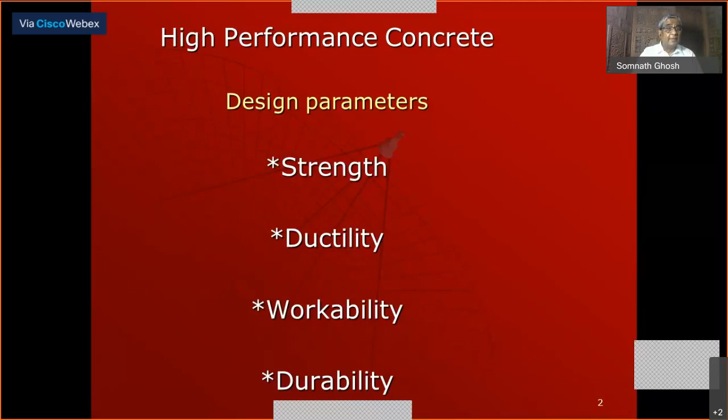Now, before I go to some experimental results and application in the industry, with the results and graphs and all these things, I would like to first tell you about this particular material, meaning concrete and especially high performance concrete, and what exactly we have to keep in mind so that we can achieve this kind of material, because we are saying high performance concrete, not ordinary concrete. So the important aspects are durability and permeability.

Nowadays, pumping is very important everywhere, because if you construct a very high-rise building, you cannot carry the concrete on your head, you have to use the pump. Pumpability is a very important aspect. Shrinkage is very, very important - we discuss about shrinkage every time. Heat generation is also important. And I have taken permeability and durability together, because I personally think these two are linked.

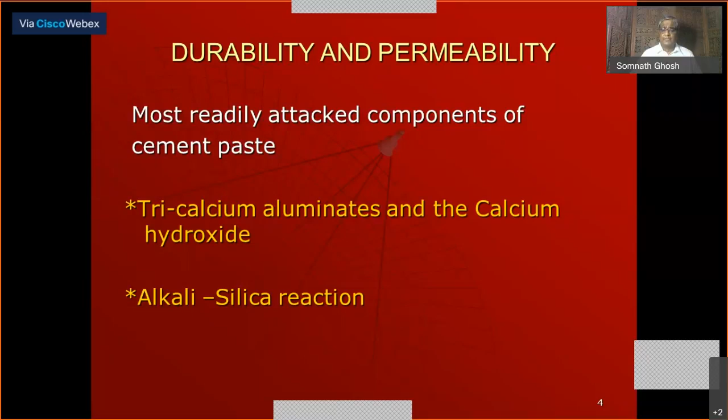You cannot isolate durability without permeability, or permeability without durability. These two are linked, so I'll come to this point one after another. When you are talking about durability and permeability, tri-calcium aluminate and calcium hydroxide. These are very important things.

These are present in cement, and alkali silica reaction is possible in concrete. Now, if you have to consider possible strategies to limit this negative occurrence, you have to limit the total alkali, sodium plus potassium, in cement, and test the aggregates for reactivity. If you can provide excess silica, which you can get from fly ash, silica fumes, and other natural pozzolans, it's good, because it will consume the presence of alkali. If you can eliminate alkali to some extent in the final concrete, it is always good.

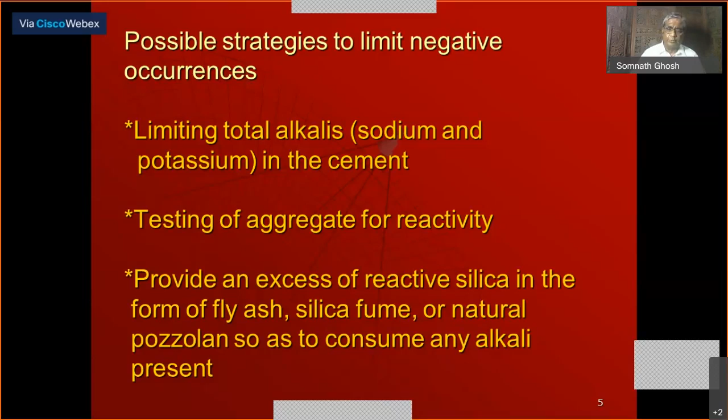Now there are a few problems. Incomplete compaction is happening, and ultimately resulting from segregation. Then micro cracks resulting from drying shrinkage and thermal stresses. Then bleeding settlement is a real problem, and the pores or capillaries, and the distribution of pore and their discontinuity is also important, because moisture movement depends mostly on this.

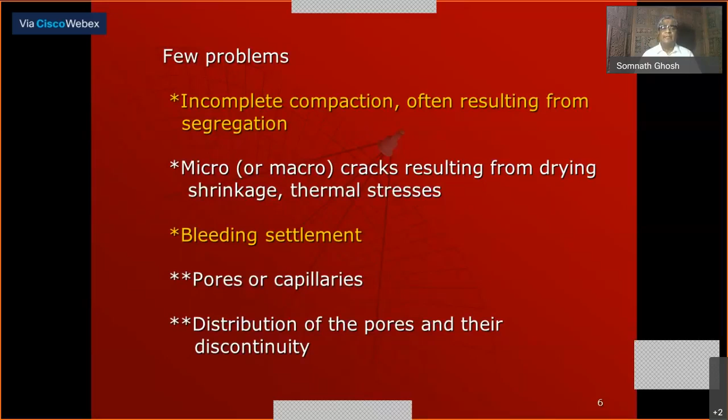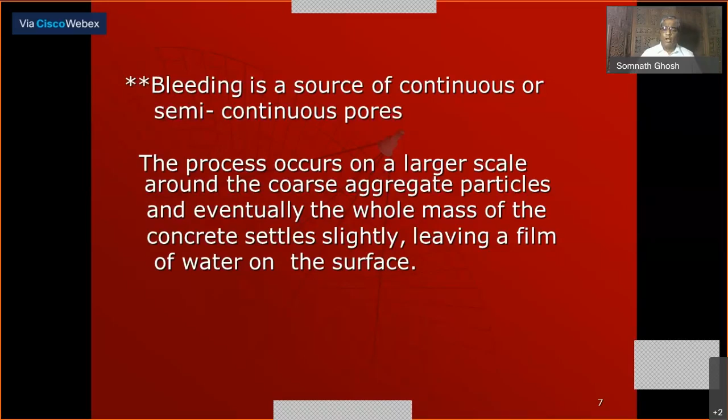Now, this bleeding is a source of continuous and semi-continuous channels. The process occurs on a larger scale around the coarse aggregate particles, and eventually the whole mass of concrete settles slightly, leaving a film of water on the surface. You all know it, but I'm repeating it, just refreshing your knowledge.

Then the reduction of permeability - this is achieved by avoiding bleeding. By blocking the channels after formation, you can really do a good thing. Pore blocking takes place as the cement continuously hydrates and extends the gel. The gels are formed and the pores are blocked. If we totally complete the pore, that is not always what I'm recommending, because I'll discuss that. But to the maximum extent, we should try to minimize the pores, because this will affect the durability and also the strength.

Now, this requires well curing, and the water cement ratio must be very low. So don't use high water cement ratio, because when we are talking about high performance concrete, there is no place for high water cement ratio.

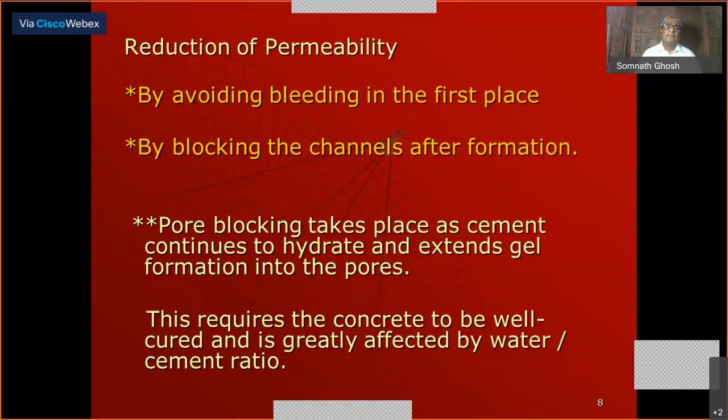Now you see, the aspect is: mortar in concrete consists of a mass of particles saturated with water, which is trying to escape in presence of more water, leading to bleeding. You all know, the better the particles are packed together, the more difficult it will be for water to pass through this mass. This is common sense.

Cement, slag, fly ash, entrained air, silica fumes - I'm telling you in increasing order of effectiveness - are good inhibitors of bleeding. Because why am I talking about bleeding? Because bleeding is very, very important in case of high performance concrete. Silica fume is the most effective inhibitor.

It may be many times finer than cement, even 10 to 15 times finer than cement particles, and it fills the space in between the cement. A small amount is sufficient in many situations, but excess amount is not really required. It is costly also.

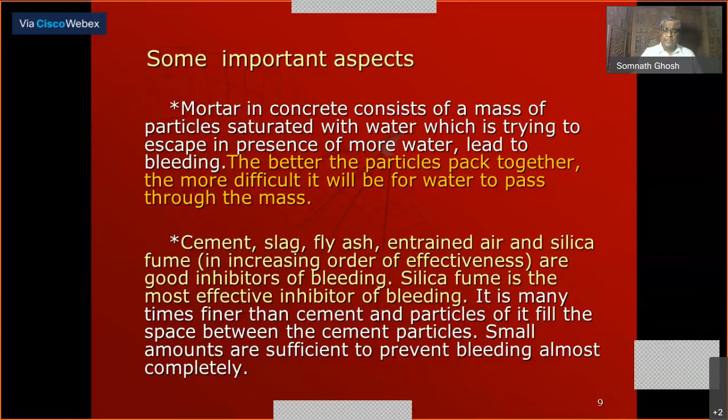Effectiveness of silica fume is greatly reduced if it is incompletely dispersed. This is very, very important. Those who are manufacturing RMC should know this, because high performance concrete, in presence of these admixtures and super plasticizers, RMC is the place where they can manufacture it easily. This means silica fume should always be used in conjunction with a super plasticizer and a given mixing time.

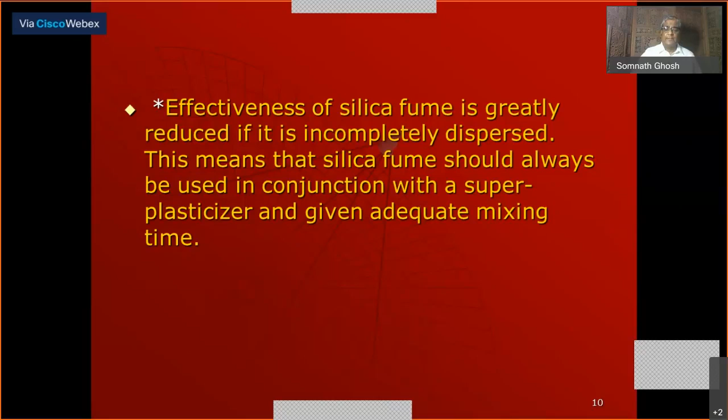So you have to mix it in, and you have to give some time. And then the question comes - pumpability. This is very, very important in case of high-rise building construction. To some extent, pumpability is equated to the resistance to bleeding, but not only this is the factor.

Now, blockage - the pumping failure occurs when the mix segregates under pressure. Segregation of mortar occurs due to gap-graded aggregates. Bleeding of water and/or segregation of cement paste may occur due to gap-graded aggregates. So you have to avoid this.

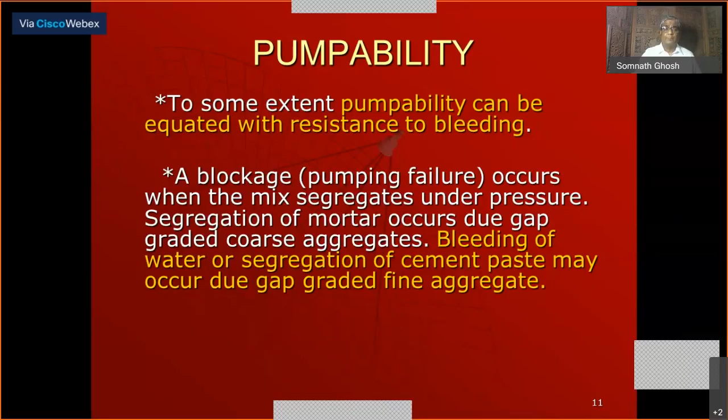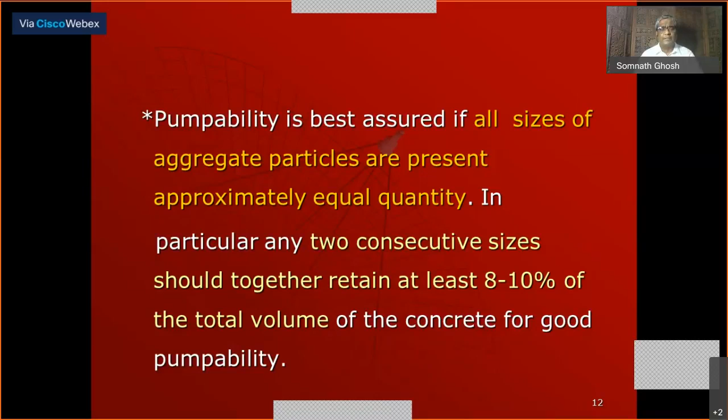Check it - now, pumpability is best assured if all sizes of aggregate particles, different types of aggregates, are present, not necessarily equal. You have to go for a mix design properly - just telling you the spirit of the mix design. In particular, any two consecutive sizes should together retain at least 8 to 10% of the total volume of concrete for good pumpability. These are all observations, and it's not that it will always happen like that.

But high performance concrete is a mixture of many things, so I'll discuss those things one after another. Now, the shrinkage.

Shrinkage is generally drying shrinkage, although further shrinkage may take place during its existence due to carbonation. The shrinkage occurs due to the contraction of hardened cement paste when it loses water. The contraction is resisted by the aggregates in the concrete, equally, especially the coarse aggregates.

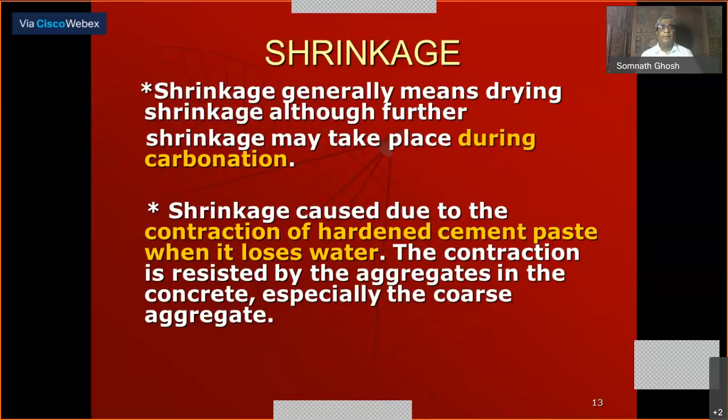Now you see, it is therefore to be expected that shrinkage will be largely dependent on the total amount of water, that you all know, and the elastic modulus of the aggregate, that you also all know.

And of course there's a problem in lightweight aggregate and many coarse aggregates which are subjected to moisture movement. That is also a problem.

And another influence is the presence of gypsum. Gypsum is very important. We have to use it in a controlled manner.

It may be noted that the action of shrinkage compensator, you heard about shrinkage compensator, is it not, is not in fact to directly inhibit the occurrence of drying shrinkage.

Rather, the normal shrinkage occurs when it is permitted to dry. So you can easily understand that during the fresh state, the shrinkage inhibitors help a lot. So the total shrinkage will come down, so you can use it.

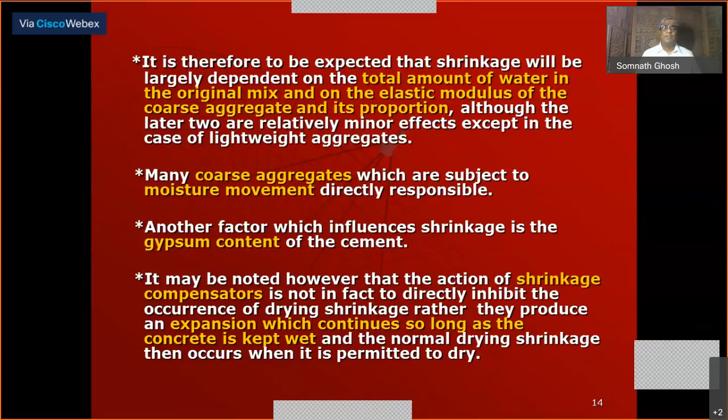Now the heat of hydration. Large masses of concrete generate substantial quantities of heat of hydration. You can always know, in dam construction it's a huge problem.

Many methods are tried to tackle this throughout the world, and essentially heat of hydration can be reduced by reducing the amount of tricalcium aluminate and tricalcium silicate present. That is common knowledge to everybody.

Low heat cement produces less heat than OPC and spreads its heat generation over a longer time period to dissipate better. You can see it takes a longer time.

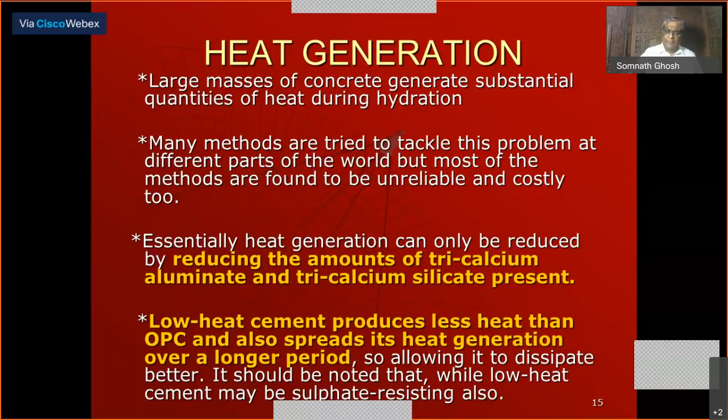So it should be noted that for low heat cement, normally we are using sulfate resisting cement. Okay, there are many other solutions also.

You see, fly ash is also equally useful in connection to heat generation. You can use fly ash to reduce the heat generation.

But the only thing is that if you use excess fly ash, then sometimes there's a problem, right?

Not sometimes, there are many reasons which, today I won't try to explain because we don't have much time, but anyway sometime I'll express in detail. So limited use of fly ash is always good.

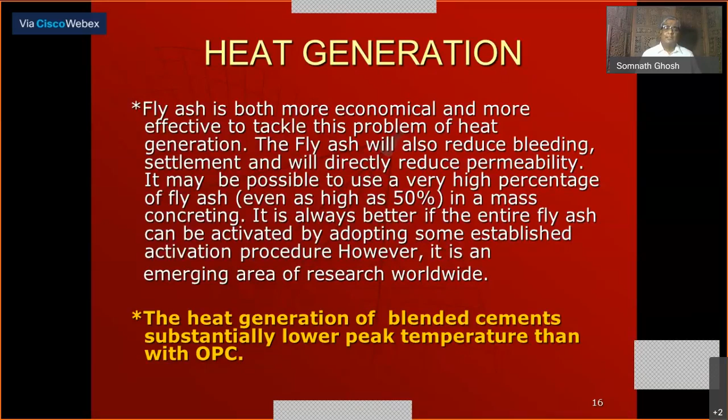The heat generation of blended cement, like fly ash cement or slag cement, shows substantially lower peak temperature than OPC. That we all know.

Now you see this, let us come to rheology, because you have to understand rheology in the best possible way.

It's a comparatively new term because it is not really discussed in detail in undergraduate courses. But anyway, it is coming up very fast, and every time people are using the term rheology.

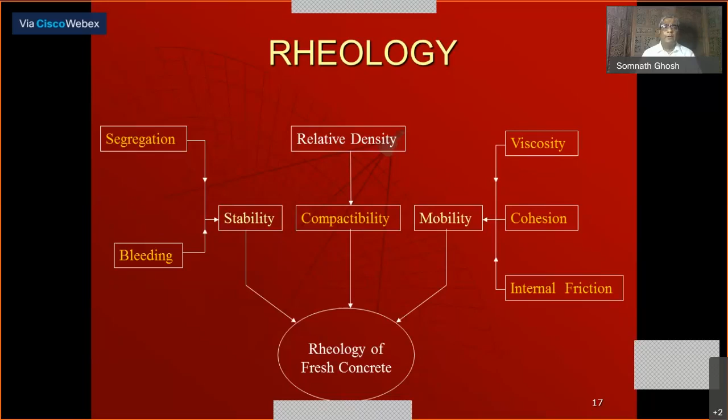Now you see this rheology, this minimum stress below which no flow occurs, that you all know, is it not? And the minimum stress is called yield stress for concrete.

You normally heard about the yield stress term for steel, but now it is for concrete, and it is represented by tau zero. The equation is tau equal to tau zero plus mu gamma.

Right, indicating the cohesion of the material. Mu is a constant term, it is plastic viscosity, and gamma is the rate of shear.

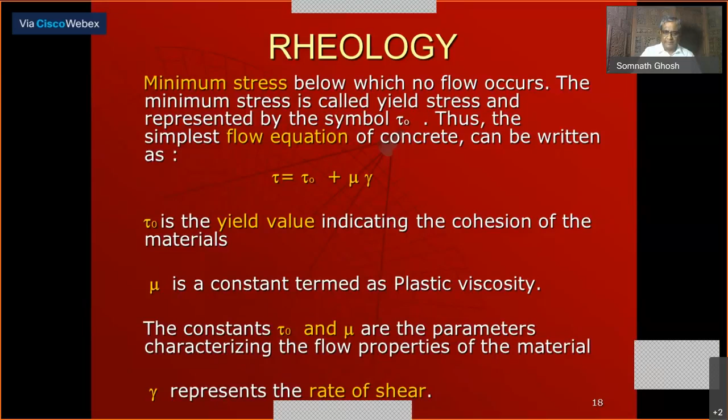So these things are relatively new to the professionals, because we are not really dealing with workability in this manner, but you will find that slowly all these things will be included. It is already included in research to a great extent.

Now all these parameters are to be optimized to achieve the desired flow characteristics and strength properties for a particular practice. That you have to understand, all these three parameters.

This is possible by designing mix using different types of conventional and non-conventional ingredients, including chemical admixtures, plasticizers, and super plasticizers. You see, in our department we have a rheometer, and we are regularly using it for this kind of measurement of all these typical three parameters.

And then we try to analyze exactly what is the status of the fresh concrete, and that is very, very important from the point of view of placing at site and compaction, and later on its performance when it hardens. So this is very important.

But today I'll not go in detail about the experimentation part of rheology. That someday we'll discuss. Now, new generation concrete, as you all know, pumping is very popular, so self-compacting concrete is very popular. If you pump concrete to the highest level, maybe a 20-story building, you cannot carry the concrete on head.

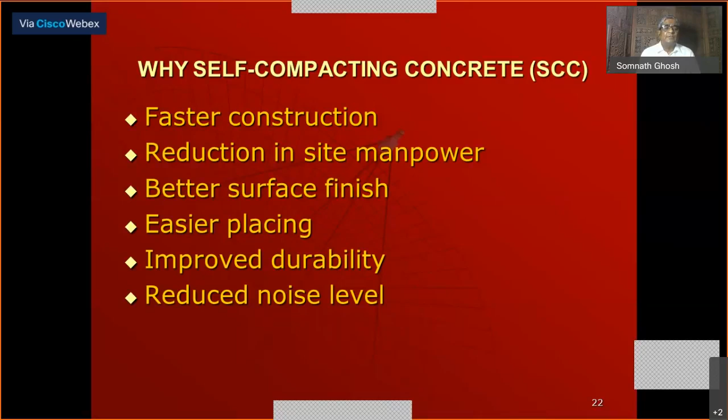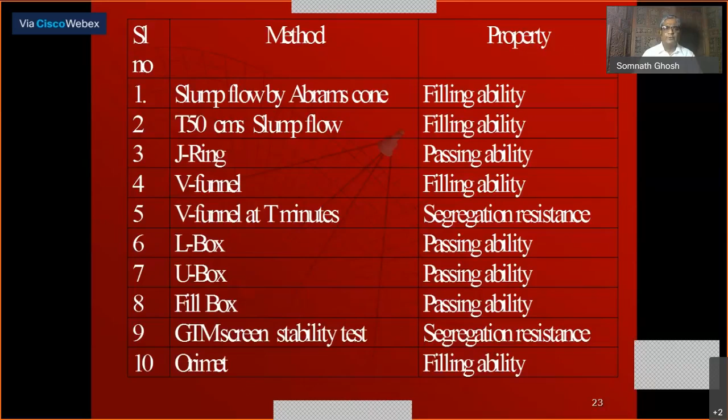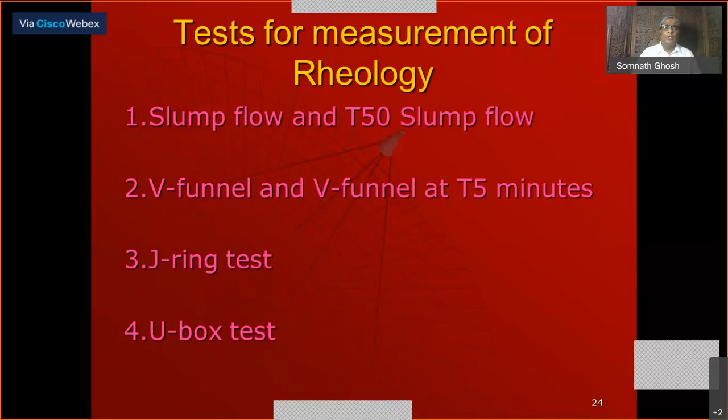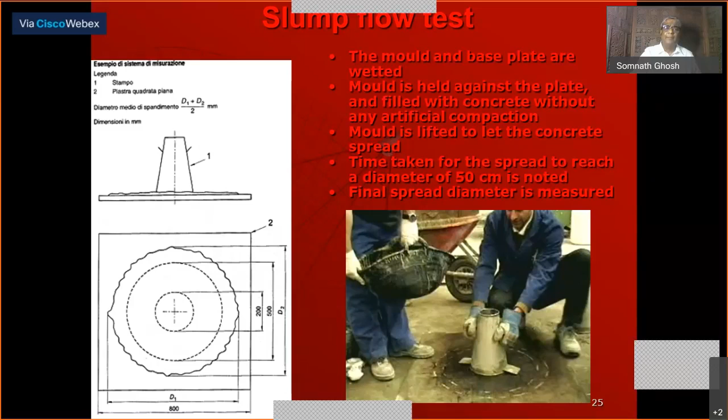And this is the kind of thing I wanted to show you, but probably Mr. Pillai will be giving me not more than another 15 minutes, so let me try how much I can cover. Now you see the Slump Flow test, which I can demonstrate later if I get time, and similarly the V funnel test. This is also easily conducted, one can conduct it.

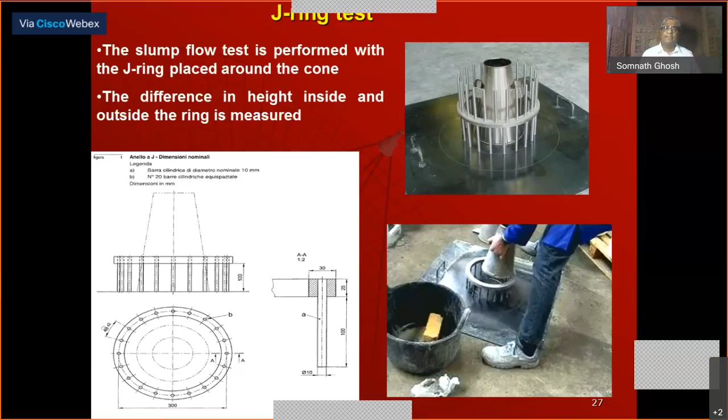And then J-ring test, you can easily conduct it. You see how the concrete is flowing through the reinforcements. That's why this kind of setup is very important to understand. And there are some other tests, U-box tests, these are also very important. I'll not go in detail, because if I try to discuss the detail of all the tests, I'll be trapped, a lot of time will be taken, and Mr. Pillai will be unhappy. I have to complete within the time frame.

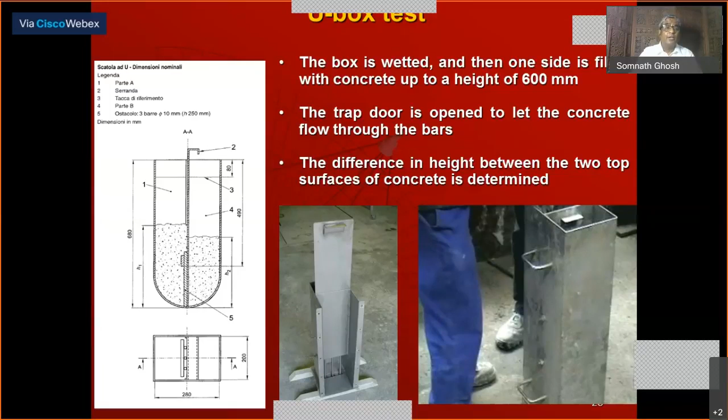So you see the acceptance criteria, though it's not in the Indian code, it's coming, it is under a developing stage. The Slump Flow, which I told you, this is the filling ability. T50 Slump Flow is also another test of filling ability. J-ring, as I showed you, is the passing ability. V-funnel is the filling ability, then V-funnel at T5 means 5 minutes, this is segregation. And the U box is also passing ability, right?

So the American Concrete Institute has recommended maximum and minimum values. If you cross this maximum limit or the minimum limit, then it will be a problem. So you can easily understand you have to fulfill these criteria, because unless you fulfill them, you will not be able to say that it is fully self-compacting concrete. So these are the criteria, very, very important.

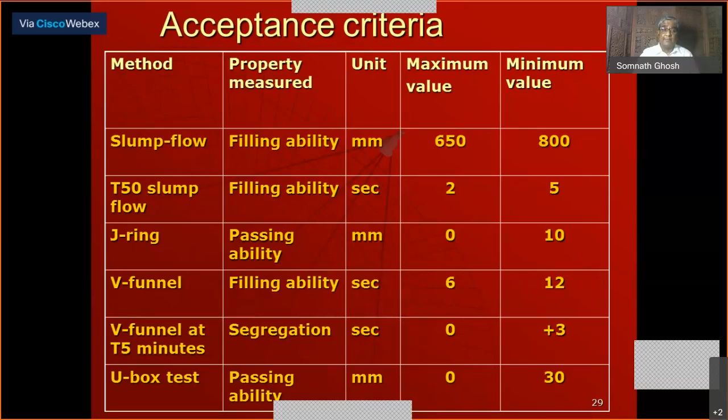The concrete which you normally get without viscosity modifying admixture, at a particular water cement ratio - if we add viscosity modifying admixture, it acts like a fluid, just like a fluid. That's why it can flow, and there will be no segregation because we have adjusted the different quantities properly so that the cohesion is there. So these are the things.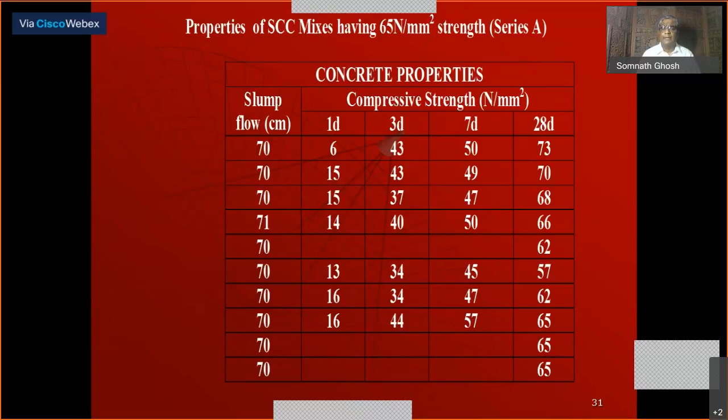Because whenever we are talking about it, previously the American Concrete Institute used to say that M40 is the minimum grade for high performance concrete. Now slowly they have increased to M50 after successful research in this development technology. And now really, not only the American Concrete Institute but other institutes, our Indian Concrete Institute too, they are thinking why not M65. So it is progressing very fast.

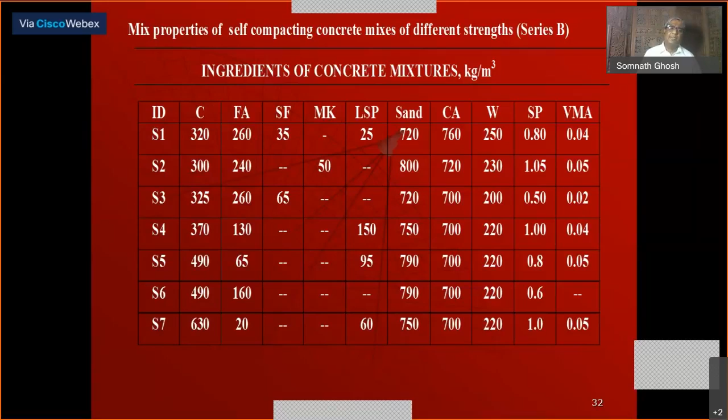After that, you see there is another series we have taken, with different types of materials, not exactly the same as the previous one. The quantities are different, and here we got a result like this - even up to 80, 35 to 80. So you can easily understand that just by considering different ingredients, and if you can cook it properly, then you will get the final result, whatever you want.

That is not always in terms of the strength. It is in terms of workability. It is in terms of ductility and durability. So that is how far the technology has developed.

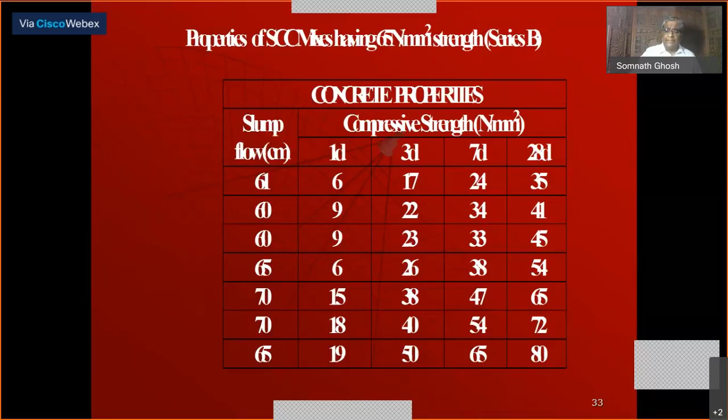And frankly speaking, when we discuss things like this, thinking that India is not at all developed - you come to Jadavpur University, meet our group, you will get all the technologies we have developed in our laboratory. And obviously, the other institutes, other premier institutes, they have also developed. You can go to them also.

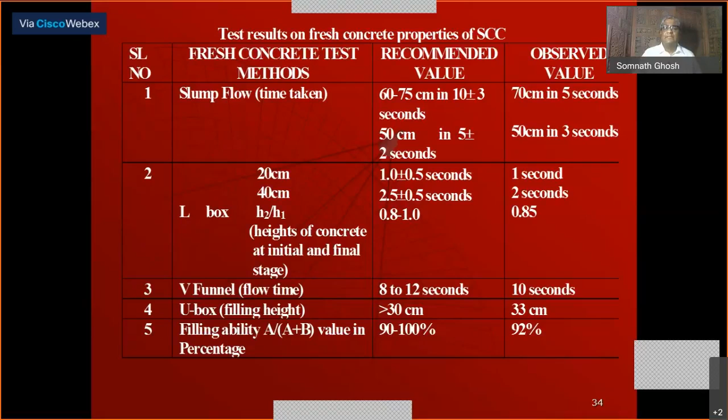Now you see, these are a few results I thought I'll be sharing. When I was discussing about our JU, definitely you have watched this data, and it is quite interesting. Similar kind of data is there. I have compared self-compacting concrete with conventional concrete. So if we compare these two, then you will be able to understand there is a huge advantage of self-compacting concrete. So I think we have understood self-compacting concrete.

In ready-mix plants, they're using it. Sometimes some problems are coming - when they mix it in the RMC plant, then it is fine, they have checked. But when they're taking it to the site, and trying to put it in the container and prepare for pumping, then they are facing some problem. The slump has reduced within 45 minutes to 1 hour. Sometimes there's a complaint. And of course, that problem also we can solve at site by adding some other admixtures. That is not an issue, right?

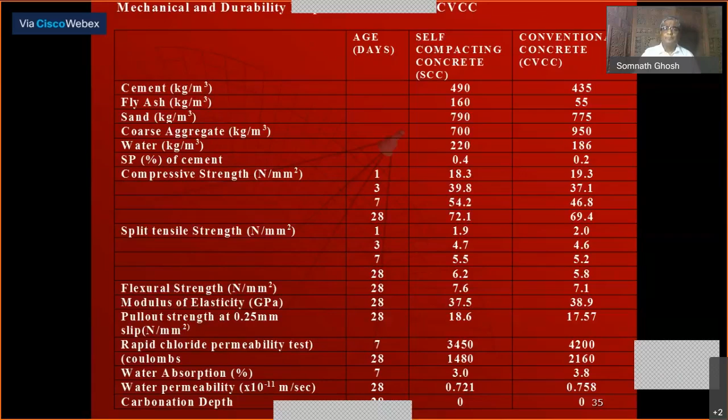So we are now successfully using self-compacting concrete throughout the country, especially in Kolkata. Next comes the use of fiber in self-compacting concrete. You know fiber concrete, you all know, you're familiar with that. But I am talking about fiber concrete in self-compacting concrete, because we are talking about high performance concrete. It is one of them.

The resistance to microcracking if you add fiber, toughness and post-failure ductility, impact resistance, and resistance to fatigue - these are the 4 major parameters which we should check while going for any experimentation or recommending whatever you do with fiber for self-compacting concrete.

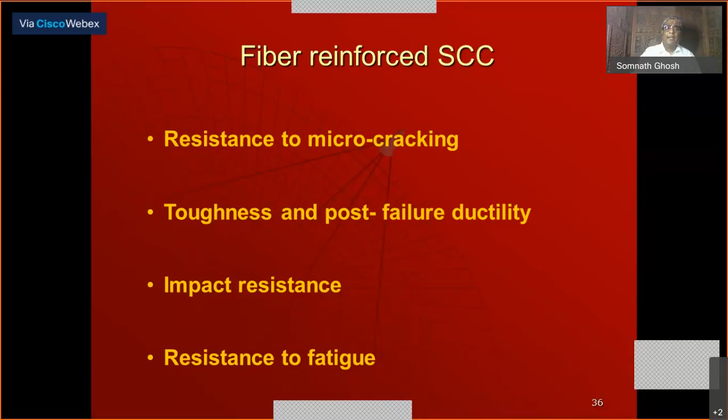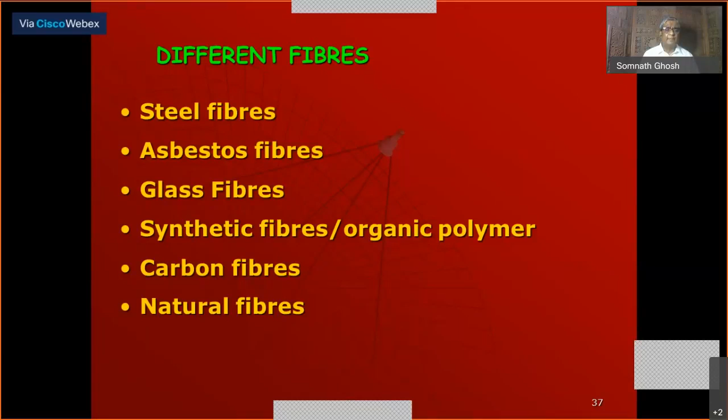Now you see this kind of different fibers we have used. We got several projects from Government of India. We have got several students doing PhD, master's degree level work on fiber concrete. So we have got that technology in Jadavpur University - steel fibers, asbestos fiber, glass fiber, carbon fiber, natural fiber, all these things. You see, these are the types, typical.

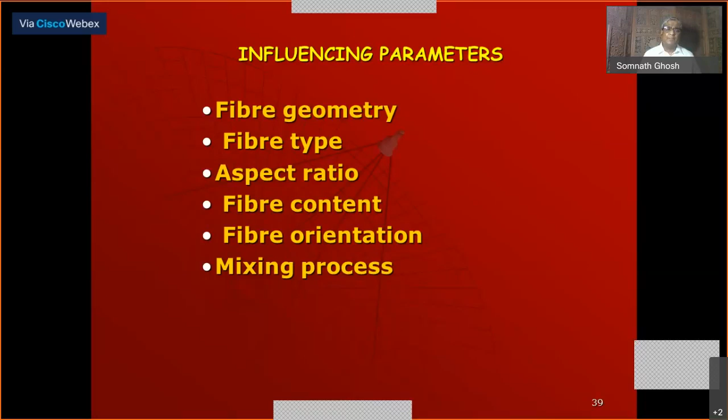6 millimeter length fiber, polypropylene fiber, 12 millimeter polypropylene fiber. One of our students, a very bright student, used this particular fiber. And fiber geometry is important - the length, fiber type I told you, aspect ratio, length by diameter ratio, fiber content, how much percentage, fiber orientation, because orientation control is important. The fiber, when you are adding to concrete, the fiber orientation cannot be controlled, but there are methods people have tried - we can orient it to some extent. The mixing process is very, very important.

And you see, this is a different type of concrete. Naturally, mini slump cone test and mini V funnel test is required for self-compacting too. That's why I've added these tests. This is also available in our laboratory because our students worked on it.

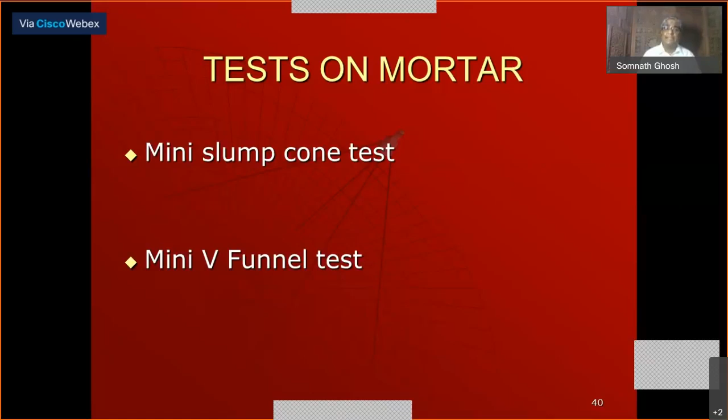These are typical results from our masters students' work. In most cases, you can avoid bleeding. Just see the right side - sometimes no bleeding, sometimes huge bleeding, like that, whatever they observe. The main point I want to tell you is that we can avoid the bleeding almost totally. That is a very important aspect. So this is the kind of finished product.

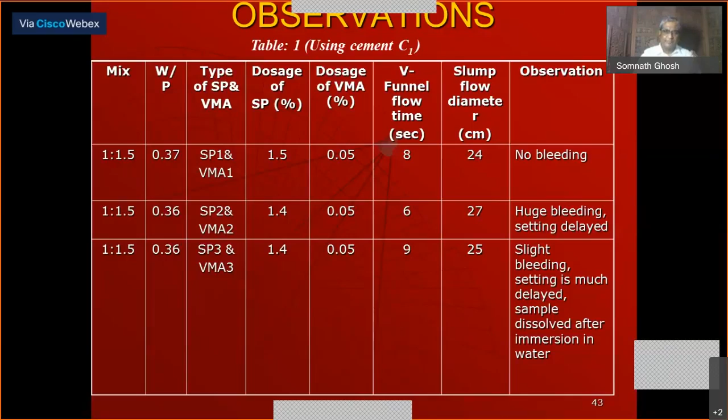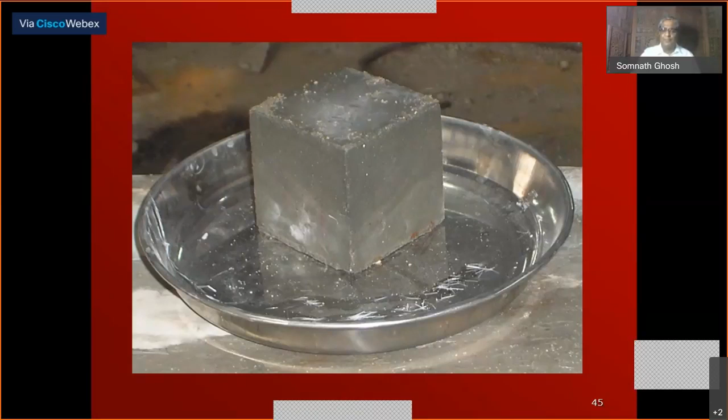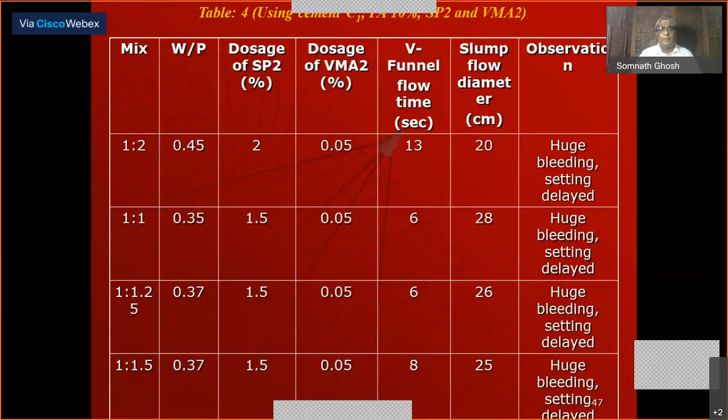You may have 10 different materials, it doesn't matter. The important thing is, number one, the proportion is very important, and at the same time one should have a mix design methodology. The mix design methodology is not only based on particle size distribution - not just sieve analysis, no. Nowadays, at least in our group, we have developed a mix design methodology based on chemical composition. When we use different materials, different types of reactions take place. We have done huge XRD and other kinds of tests, and we are sure about the reactions taking place. We have incorporated these things into our mix design methodology, and we have published papers. I think slowly the mix design methodology is going to change, based on the chemical composition of the ingredients.

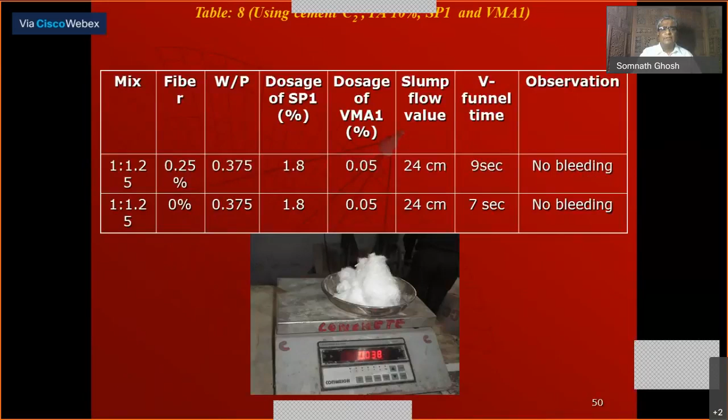Now you see, this is another similar kind of result. This is the kind of fiber we have used - just somebody is weighing it.

Now let me introduce you to geopolymer concrete. In many situations they are calling it geopolymer cement, and I'm sure that Ramco will one day develop geopolymer cement - maybe they are already developing it, I don't know. This geopolymer concrete, or the geopolymer binders, are synthesized by thermal activation of solid aluminosilicate source materials with an alkali metal hydroxide and silicate solution. Not all alkali metal hydroxides are equally effective. What you are doing is adding solid aluminosilicate sources, for example fly ash.

If you add this hydroxide-silicate solution with fly ash, you will be able to form the gel, and you have got the aggregates. If you mix the concrete and do it properly, you will get a highly durable concrete, also ductile, and also very high strength.

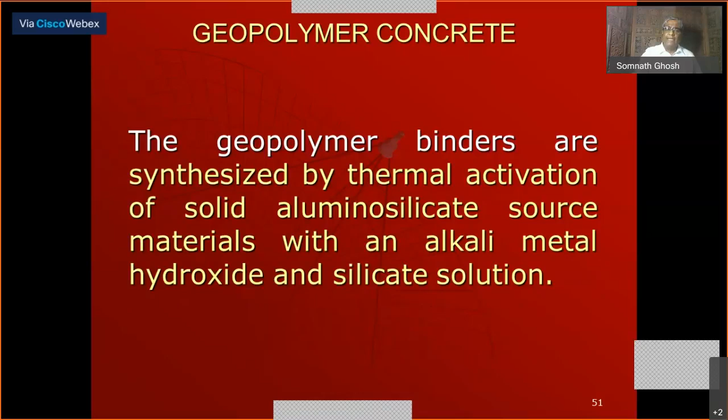In this particular area, our department - I must say we are the pioneers, we can always claim that. Now many people are doing it too, but they still discuss with us when they have problems. Our department has published more than 50 to 100 good papers on this subject, and produced a number of PhDs and master's degrees. So it's huge, though it is not yet that popular in the industry - it will come, it will come. Now people are getting confidence. Two companies have already started manufacturing.

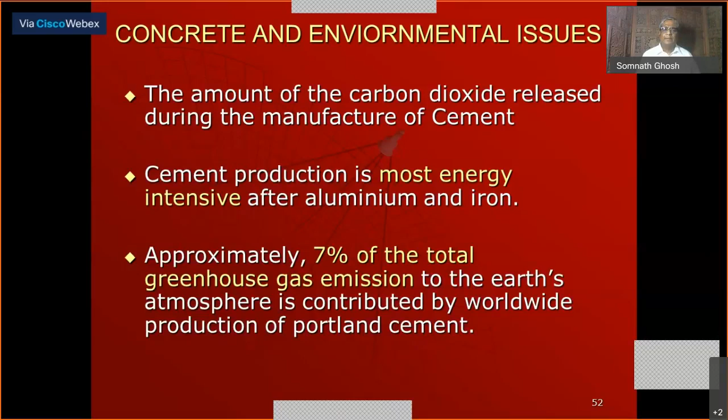Anyway, I'll come to that later on. The main problem is that when you manufacture cement, you produce a huge amount of carbon dioxide, which affects global warming - you can easily understand this, so we have to avoid it. This greenhouse gas emission is dangerous for the global warming problem. You are using limestone for manufacturing cement, and if you can do something else and save the amount of limestone, it's good for the future.

Now it is environment friendly - synthesized from waste materials: fly ash, GGBS or GBFS (ground granulated blast furnace slag), metakaolin, silica fume, rice husk. Easy to manufacture, and most importantly, high performance. We have already developed geopolymer up to M80, and both strength-wise and durability-wise everything is good. But it will slowly become popular in the market. In the US and in Australia, it is already popular.

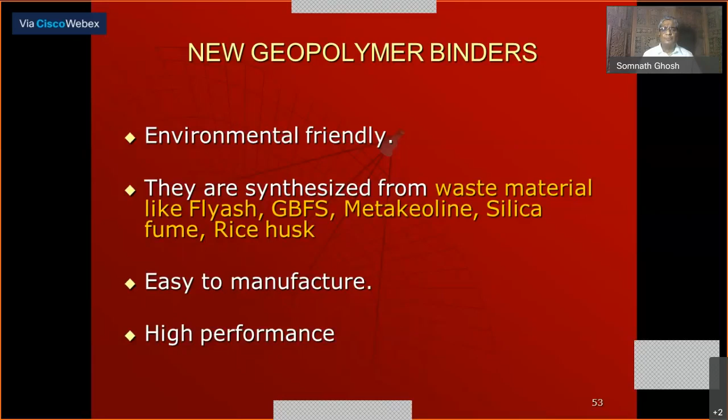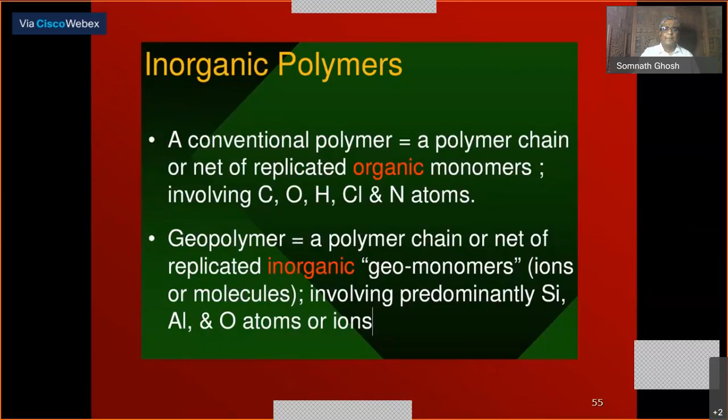Now I'm watching the clock. We don't have much time, so I'm just skipping all this chemical part of it. Just see this particular slide.

The Portland cement requires 1450 degrees centigrade for calcination. And then hydration, and your calcium hydroxide forms, CSH gel and calcium hydroxide forms. That is about Portland cement.

But when you come to geopolymer, you don't need to heat so much, because you just mix those things, and you have to cure under a temperature of say 50 to 100 degrees centigrade. And now we have also developed a technology where this 50 to 100 degree temperature heating is not required. We can just do it like your normal concrete, and you will get it.

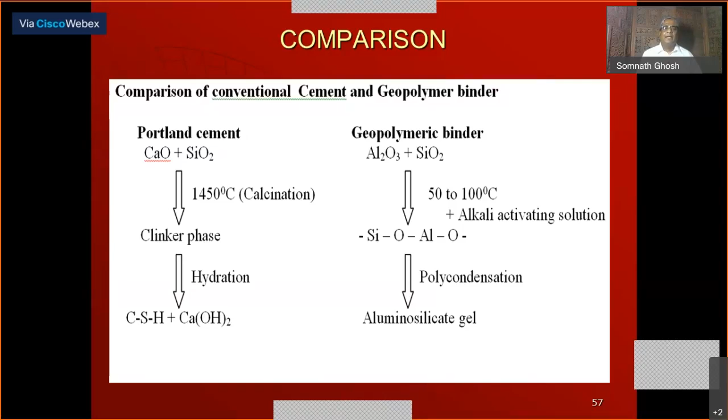After polycondensation, the aluminum silicate gel will form, which is the binder. Just to compare the major difference: manufacturing using natural resources such as limestone, and here you are using aluminum silicate waste material. So you are utilizing waste. This 1450 degrees, there is no calcination stage required.

Then the CO2, obviously CO2 is less. There is hydrolysis, then polycondensation. And for curing, you may have to go for thermal curing, but I told you that we could avoid that particular area also. Because that is also very important, that is the requirement of the industry. I personally talked to the industry people who are using this, and they said, sir, if you can do it like our conventional concrete, then we tried and we are successful.

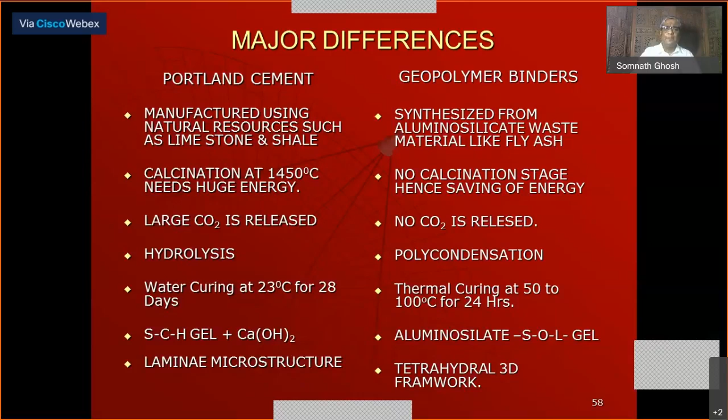Very little drying shrinkage, low creep, extremely good resistance to sulfate, chloride, alkalis. When you are adding fly ash, the total alkali, whatever the calcium hydroxide is consumed, so there is no presence of alkali. So alkali cannot do any harm to the concrete.

Excellent resistance to fire, it can withstand that. Many PhD students worked on it, and ultimately found that it is good up to 1000 to 1200 degrees centigrade temperature, and the freeze-thaw resistance is very good, and alkali aggregate reaction resistance and high durability. So all these things are much better than

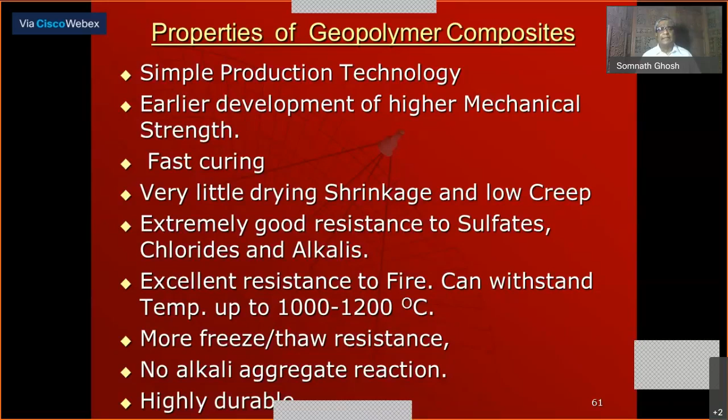the conventional cement because of the polymeric structure. It is CSH gel in cement, here it is different, and here the gel is a polymeric one. That is why you are getting the huge difference, and you are getting better concrete.

Now you see, normally the fly ash we are getting from thermal power plants, a huge amount of fly ash is coming every day. It is increasing. Only 30%, 40%, I don't know, Mr. Pilla will be able to say, is used in cement manufacturing, construction, block tiles, etc. The remaining part, where will it go?

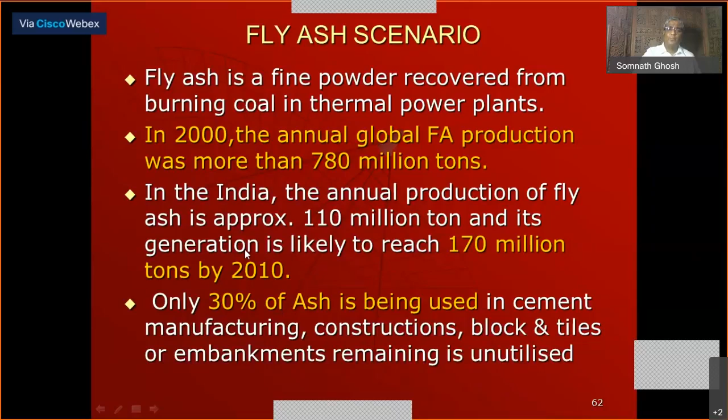So automatically, this is a choice, geopolymer. And you see that this fly ash, which is rich in silica and aluminum, has the potential for full utilization as a source material for geopolymer. I told you, mind it, silica and aluminum. Fly ash is very rich in silica and aluminum.

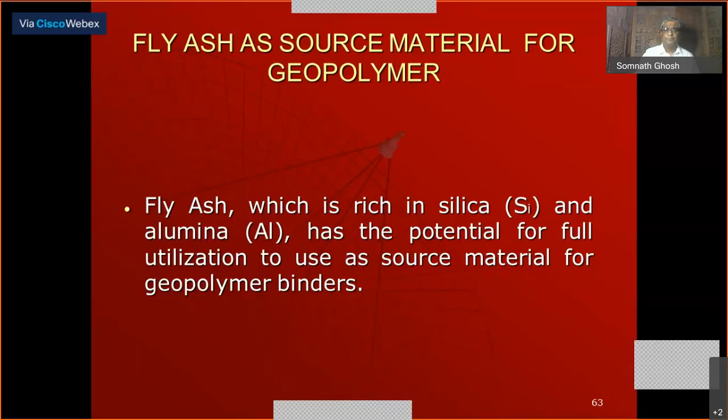That's why it's happening. Now this particular geopolymerization reaction is a multi-phase reaction, exothermic, and a bit complicated. We will add fly ash, it will dissolve, and after that the polycondensation will start, and we will ultimately get the gel, and we will be able to produce a concrete.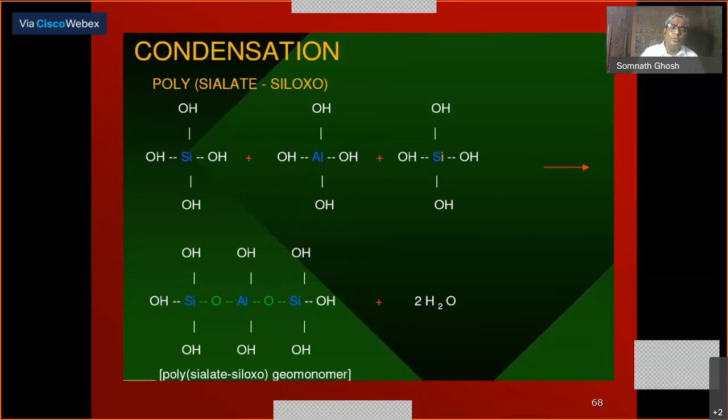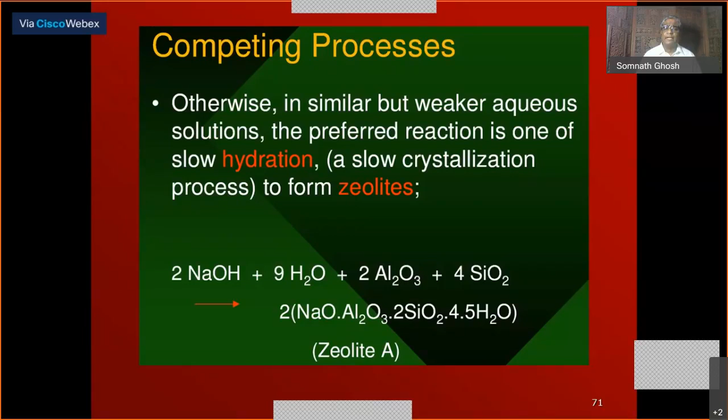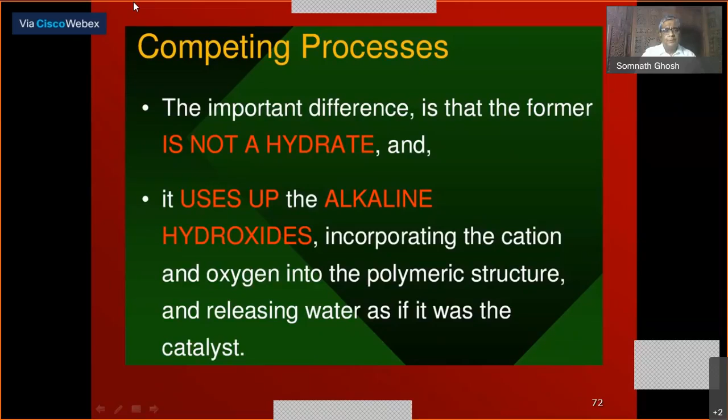So I'm not going into detail, these are the detailed things. I thought I'd be able to share it, but I know that one hour is not always sufficient, and it is not always good to discuss all these things in a particular lecture. If we want to discuss something about the reaction, we'll discuss only the reaction, that is not an issue. But I'm giving you an idea about it so that you can understand how good it is. So things I wanted to discuss, but now it's not the time.

You see this is a particular flow chart. If you really want to produce a very good geopolymer, then you have to understand this particular flow chart properly.

So when any researcher comes to us, we first give them this particular flow chart, and we make them understand all this, so they can take bigger steps.

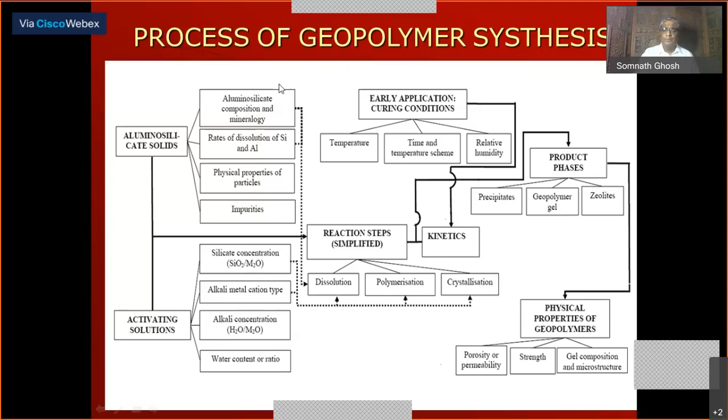This is a very good table, useful to geopolymer researchers. These are the main parameters. If you use sodium hydroxide, that molarity is important. Then the sodium silicate and sodium hydroxide ratio is important. Then sodium silicate and sodium hydroxide total divided by fly ash, or other pozzolanic material, that ratio is important. Most important is the silicon-aluminum ratio, and water-geopolymer solid ratio is also very important.

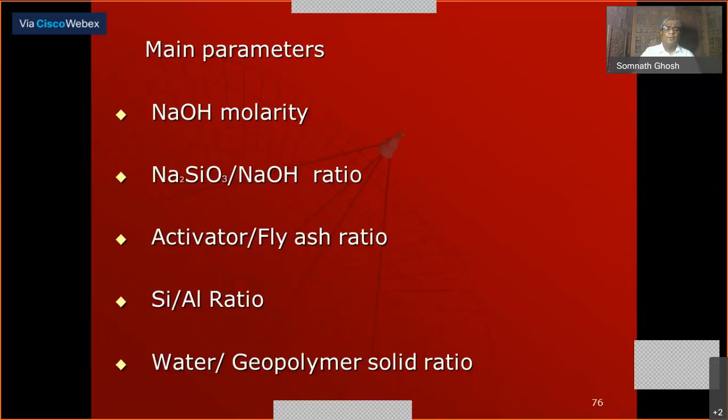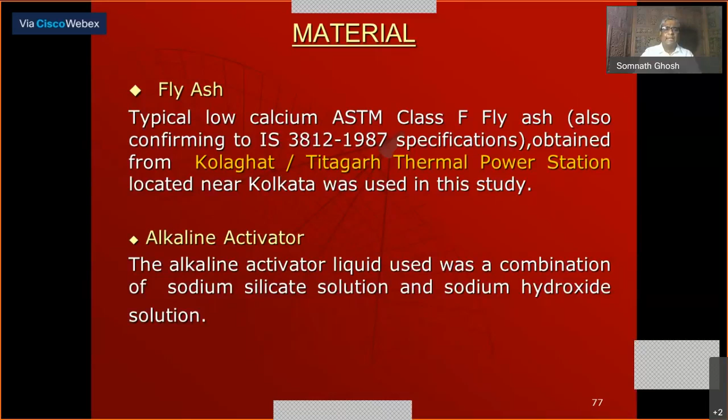We have used fly ash mostly from Kolaghat and Titagarh, and collected the activators from industry. For fine aggregate and admixtures, we have used different types and different proportions - mix 1, mix 2, mix 3, and so on. This is in detail, but it would take a long time to describe all these things.

It is not that we have taken only one step - we have taken 10 steps and are trying to make it popular in industry. Maybe another 5 steps are required from industry people to make it a full success, and research should go on because we always want to produce better and better material.

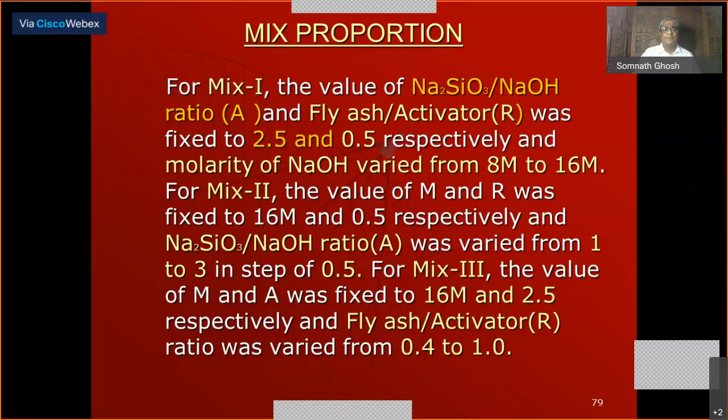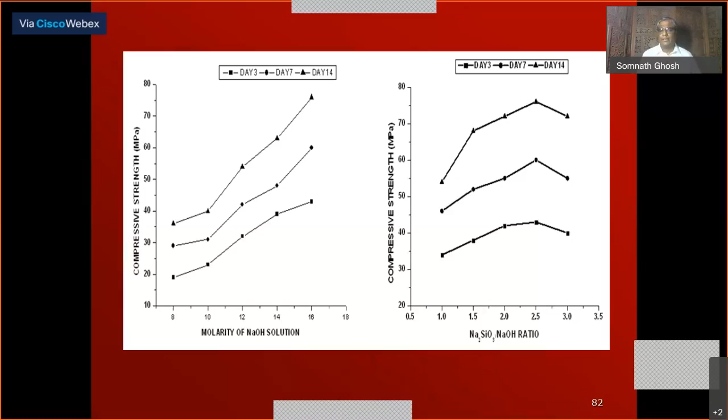This is not the work of one PhD student or one master's student - it's huge. We have developed all these things, and we can advise other people. We are advising, and this is a typical graph.

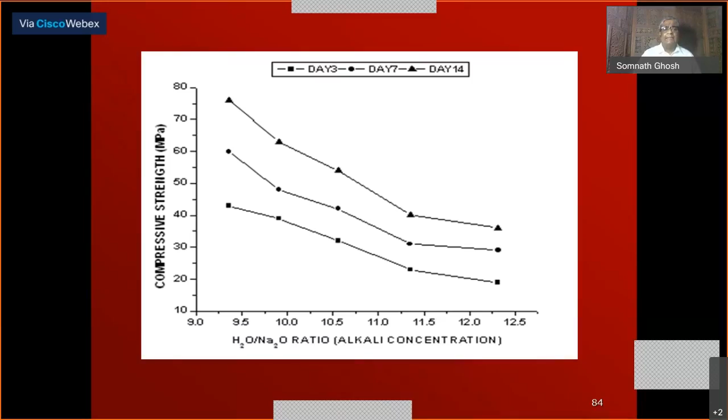With your other knowledge of mixing and such things, you will be able to produce something, and through trials you will achieve it. So we have worked up to this point. It is not just particle size - it all depends on the chemical reaction that takes place.

And after other concrete tests, we could produce this kind of graph, which I can tell you is very rarely available. I don't know of any other - we have developed this.

We are also working on recycled aggregate concrete, fiber concrete, high performance geopolymer concrete, rheology of concrete, and bacterial concrete. In bacterial concrete, one of our colleagues, Dr. Saurabh Mandal, has worked a lot.

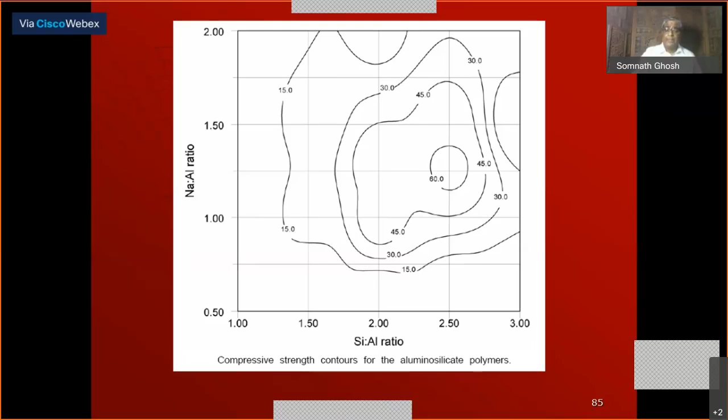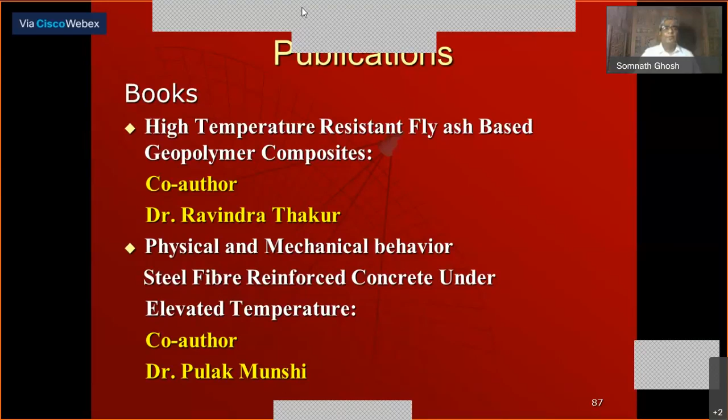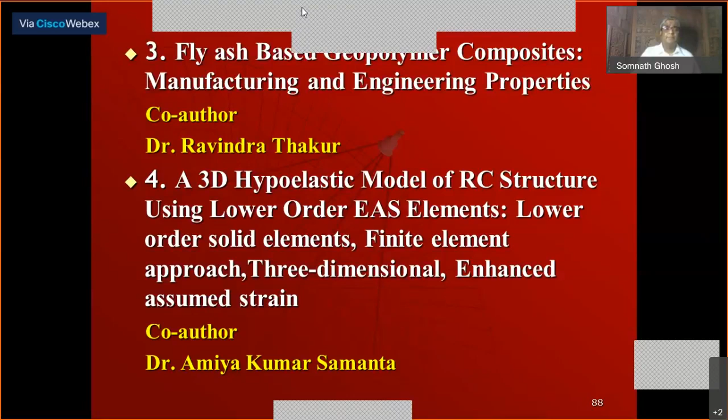And these are books I have with different persons - we have 6 books on different types of high performance concrete with geopolymer and such topics. These are two books: the second one is on fiber concrete with Pulak Munshi, the first one with Ravindra Thakur. Another book, also with Ravindra Thakur, is on finite element analysis of RC structures with Amiya Samanta. Then another on durability with Suresh Thoksom and Partha Ghosh. And another book with our colleagues Santosh Das and Ravindra Thakur is on fiber reinforced self-compacting concrete.

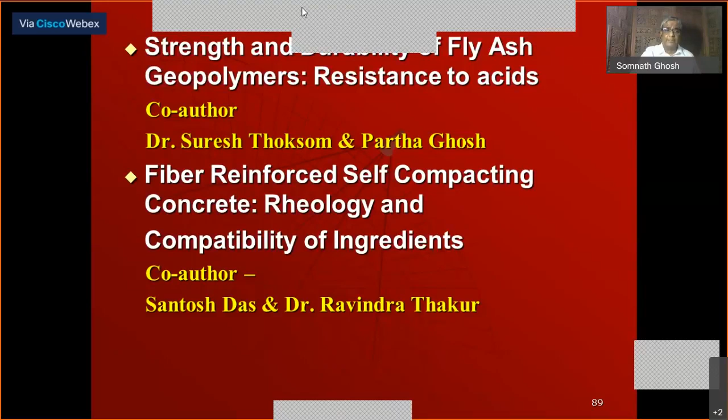So these are about our group - this is a few of the researchers who were associated with our JU group. Our JU group is very strong - I must say very, very strong in the country.

Then Dr. Saurabh Mandal, Partha Ghosh, Ravindra Thakur, Pulak Munshi, Somen Saha, Dr. Amiya Samanta, Dr. Suresh Singh, Dr. Qureshi, Dr. Arundev Gupta, Professor Dr. Kollan Mandal, Dr. Devabrata Datta, Dr. Kushal Ghosh, Dr. Moinak Mollik, and Dr. Pankaj Mitra. There are other students also - if I tried to list them all, it may cross 50. So that is the problem.

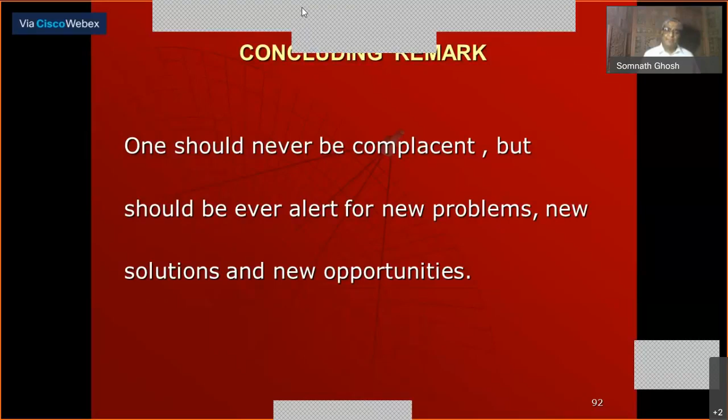Whatever I wanted to tell you in this particular webinar, I have already discussed. The only thing I must state is that one should never be complacent, but should be ever alert for new problems and new solutions. Please remember this, especially those who are junior. And with this, to this session, thank you very much.